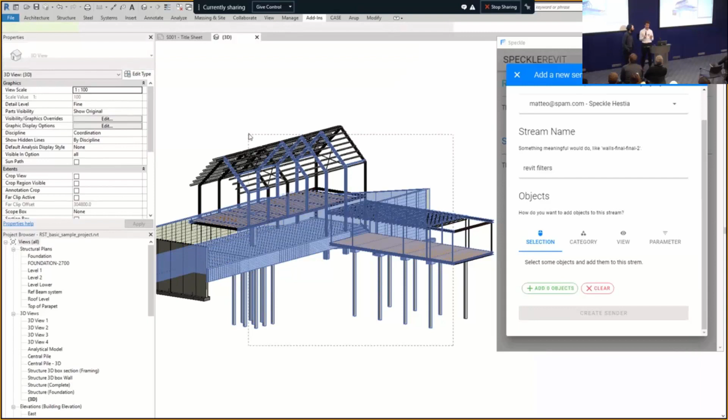Yeah, so a few slides on the clients and some of the updates on the clients. Here we're showing the Revit client. If you don't know, it's been released in beta, so it's part of the installer, you can download and try it out. Here we're showing that we added selection filters. So when you create a sender and you want to send geometry, you can filter by category, by selection, even by parameters and view.

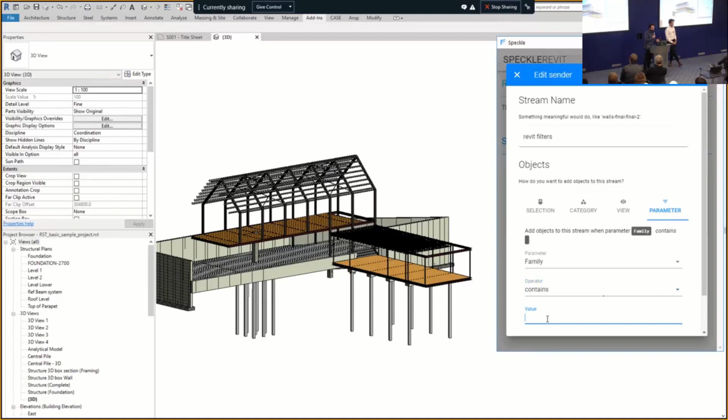So you can see here how we are selecting elements by a parameter, for instance, and all the objects that have that parameter with a specific value. So you see how you can specify an operator. If a family name contains 'pile cap' in this case, all the pile caps will be selected. So this is just to give more control over what is being sent and how.

And if you want more information about the Revit client, just visit the documentation online. Here is a screenshot of the Excel client that Mish is going to present in his speech. This is not being released just yet, it's not part of the installer, but he might mention how to try it out. And it's great, you can see the shiny UI, so it's pretty cool.

This is the Blender client, which is not really new, it's been around for about a year. It's been developed by Tom. For all the Blender users out there, check it out on GitHub. It's ready to be used, and it works well.

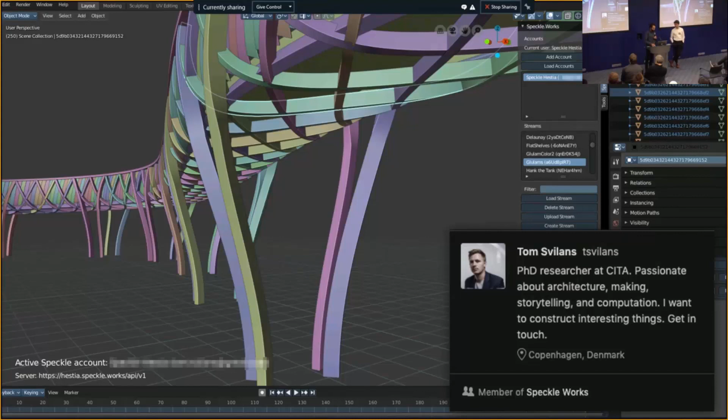Next. Yes. A bunch of other features? Yes.

A bunch of other random stuff that happens from the community, right? So, is anyone programming in Go here? No. Does anyone want to program in Go here? Well, I do. Cool, yeah, good.

So we now have Antoine, who developed a Speckle Go client. So if you want to hack applications together in Go, you have a starting point to work from.

We also have a nice Python SDK. I know there's probably a lot of Python users out there. Hello Giovanni, welcome, you're a bit late.

We have a quite well-developed and well-tested Python SDK for Speckle, which helps you scaffold whatever Python script or Python-based application you might have to talk with the Speckle API. It was developed originally by Tom to be used in the Blender client, then Antoine came in and did the documentation, and Izzy contributed too, as far as I know. Izzy's going to talk more this evening. Wonderful stuff for the developers out there.

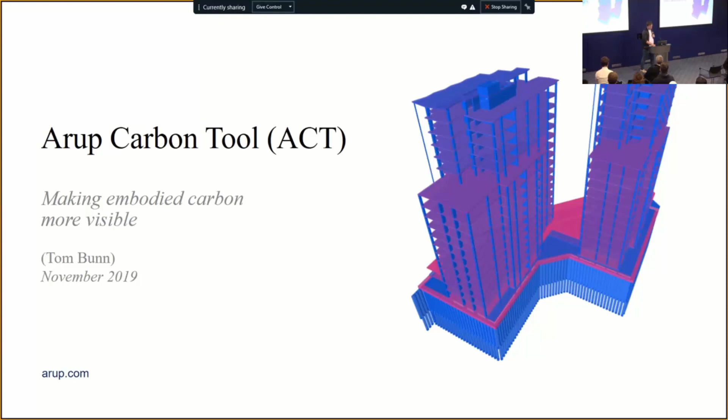Here's a screenshot of the tool itself. I've got a video in a second, but I thought I'd put in a couple of screenshots in case that video fails, which happens quite a lot. The tool is built through Speckle Viewer, and again, I'm not a developer, so I'll let Dimitrie maybe speak about the details at some point.

But once you've pulled it through from whichever software you're using, you can visualize where the materials are used in your project, and it gives you a nice graphical output of where your A1 to 5 carbon, for those who know the RICS method for embodied carbon, sits within your building. Here's an example in King's Cross that we're currently designing in my team, where you can see that the steelwork for the structure on top has the most significant impact.

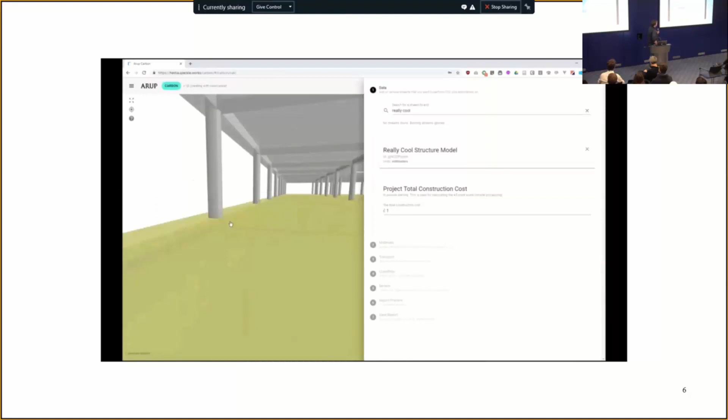So we put the stream in, we put a cost against the project, we filtered down by Speckle type, and so it gives us columns, walls, slabs, beams, whatever. We can apply a material against that.

Unfortunately, Arup's Revit models don't map well against the ICE database. It's a bit of a manual task at the moment. You've got to go through and go, okay, that's that. But it gives you a nice way of going, okay, the purple ones are that, and I know it's the right thing that I'm putting in, and you can check against it.

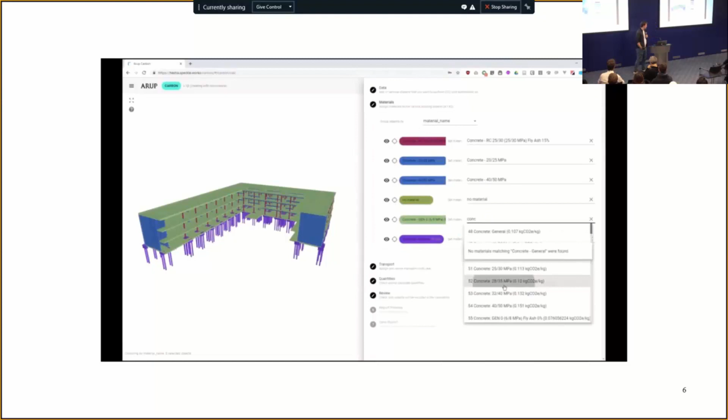With A1 to 5 carbon, you've got to put transport details as well, so it gives you some standard factors, or you can put in your own custom ones if you know more about your site. And it generates this nice report, and you can go back and go, actually, that's not concrete, that's timber, that's whatever else. I want to make the report look better. And eventually, it spits out this.

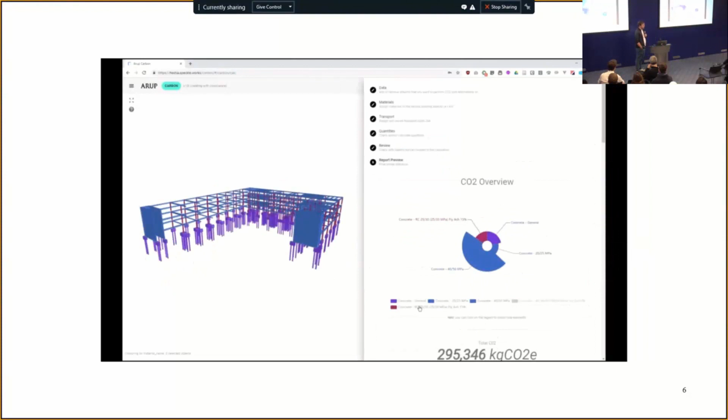Let it run for a second. There we go, and you can kind of filter down and go, that's where the carbon is, and there's a link to methodology we're using. You can give it a name, and you can tag people like Graham, who's here tonight, and say, Graham, there's a report for you. He'll pick it up in his Speckle projects, and can go view it.

And so we can send this URL to architects and clients and whoever else we want. We can pick it up in a review. They don't need to have Revit installed or Rhino on the machine or any other visualization software. They just need to have the link and a connection to the internet. And we can then talk around where the carbon is, what the project is currently doing, and how we can make it better.

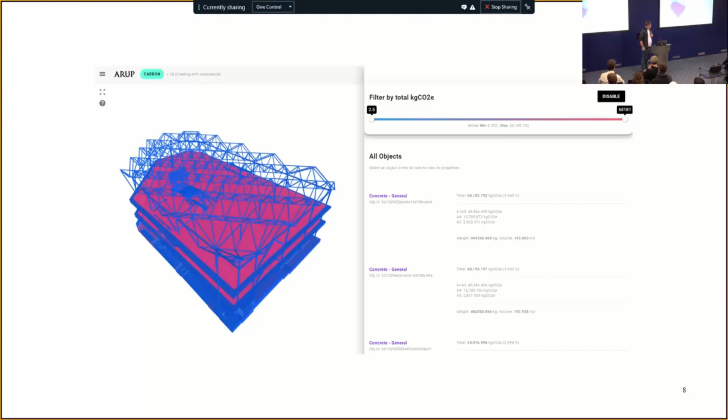So what we're finding with the tool itself, we are one of many tools that are looking at embodied carbon assessments. I think at my last count we had about 20 competitors within the industry. We're not too worried about that. There's very few that are doing this kind of nice 3D visualization, if any.

Lots are focusing on how to graph that information in Power BI, whereas we think we have a real kind of interesting slant on things there where we can kind of spin a model around and see it in real life.

Non-modelled elements have a significant impact on the overall embodied carbon equivalent of our project. So we saw some structural models there, and structural engineers don't usually draw rebar until about stage 5 of a design, and therefore we can't pick that up.

So Dimitrie's given us a quick hack recently to allow us to put custom volumes into the model to account for that. I think later iterations of the tool are going to find a way to neatly push that in.

Embodied carbon factors vary between regions by amount, which is significant. So when this database by the ICE is set and it's updated on a regular basis, they're saying, okay, your steel is produced in the UK, and the UK has a fairly clean grid, and the energy they use to produce that steel is not too bad.

Whereas if you went to use this tool in Australia, which is coal heavy, your factor would be much worse. So we might have to look at ways of getting around that and getting new data sets in.

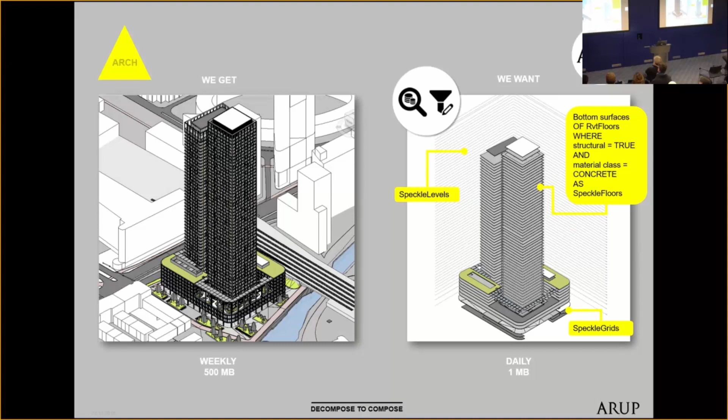So what I've been doing in a lot of projects is just exploring these models that we're receiving and writing queries. But this can be cumbersome and quite a maze sometimes, and I wouldn't recommend it all the time. But I want to show some examples where I've used these model queries for different file types and set ups.

To generate new models, I'm going to start off with the same example. As you all know, Revit is a highly structured piece of software. For this project, we got Revit models from the architect, and we need to set up an analytical model.

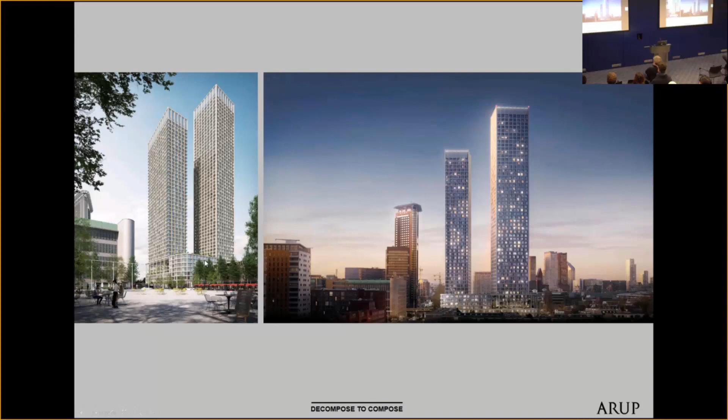And as a little exercise, I thought, okay, can I generate a structural BIM model without doing any modeling? Because I know the engineers were building an analytical model in their software, in this case GSA. So I just needed to link these two sources of information together and generate a well-aligned structural model.

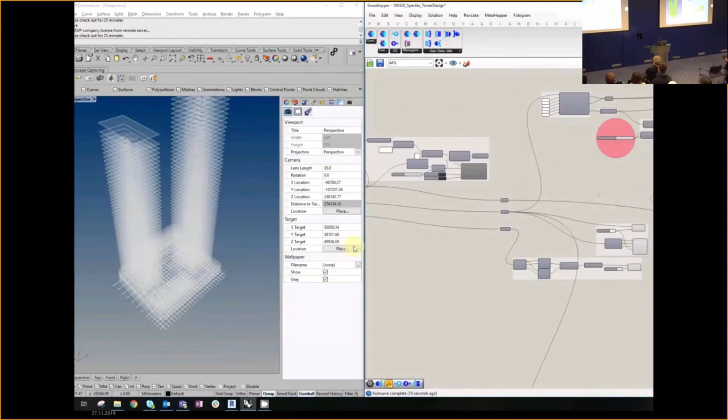So this was I think like 7 months ago, this project, where there was no Speckle Revit yet. So I built my own little query in Dynamo, and I would stream the levels, grids, and floor outlines and some properties. And then based on the information that was coming in from GSA, I would match these two to generate an IFC model using Geometry Gym, with some control over the bridge, some openings, positions, offsets, alignments.

And then this I could stream back to Revit or export as an IFC to send to the client. So this was a little exercise. It's not a perfect workflow.

If I would do it over again, I would do it way different. But this is an example of how you can use Revit data from an external party to generate something new.

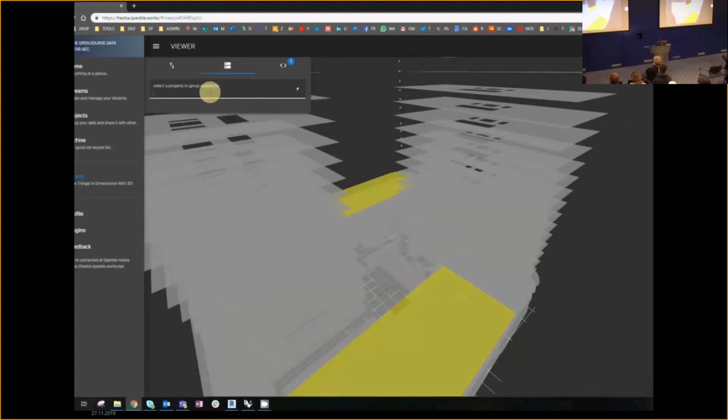So yeah, this is the old viewer. It has been improved now. There is some clipping going on, but here I'm showing that what I'm generating is this structural model that is now coordinated with the architectural model, because the scaffolding is from the architectural model.

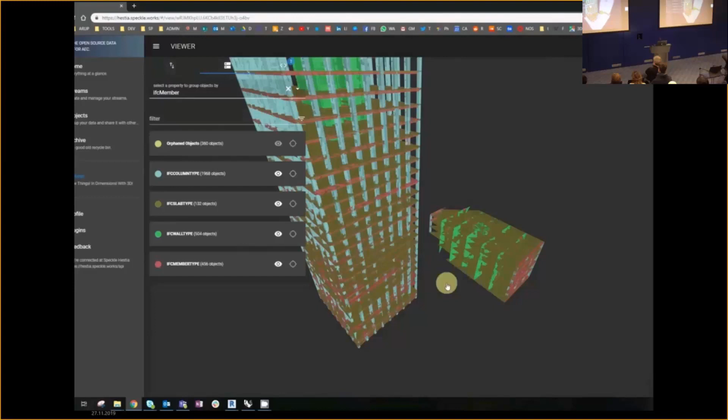So that is that. Next up, PDFs. It sounds old school, but we do a lot of retrofit projects, and we still handle a lot of PDFs. I work with them all the time, and I receive them. What we have to do, what we can do, is decompose PDFs.

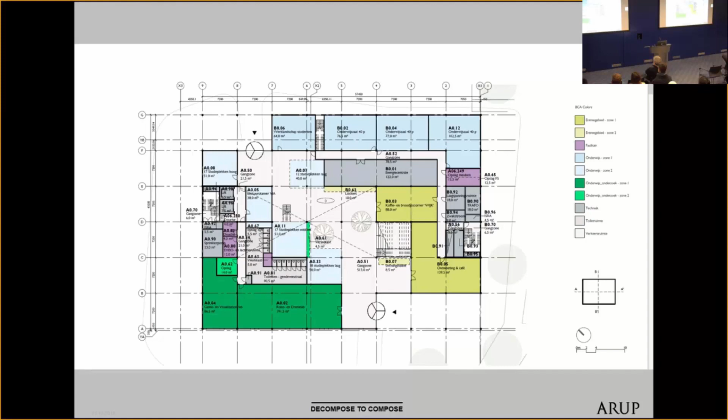They're like, if they're vector based, they're line objects, they're colors, there's legends, there's text objects. You can interpret that and translate that. And here there's elevations. So when you import that in Rhino, for example, you can look at the placement point of these PDFs and with some logic align these, and then match these colors to the legends. And what I would do then is generate Speckle objects in 3D.

So this was also a little exercise, but I can imagine if there is a client or anybody who has a stack of PDFs that are organized or structured the same way, you can generate the scaffolding of something new very quickly. So then here Speckle can be used to process a batch of PDFs.

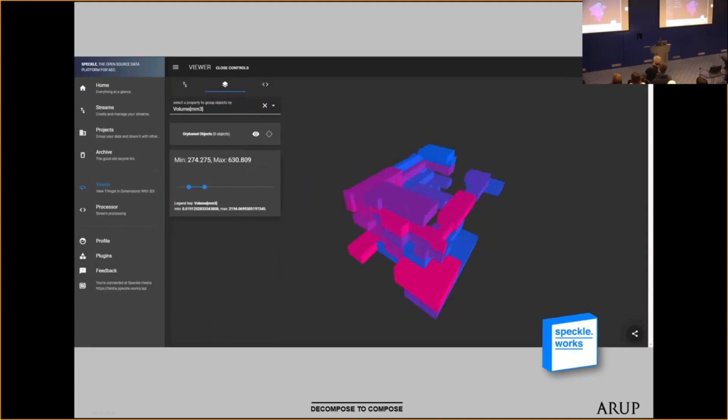Next up, also IFCs. You can decompose into individual elements. So this is another project we're doing in Amsterdam. They're building it now, one of the tallest timber high-rise buildings, I think. And right now we're in the construction phase, getting IFCs from the contractor on a regular basis.

IFC is a file format that you're not supposed to decompose. Yeah, you can decompose it, but not generate something or edit the content of it. But you can decompose it into all the property sets that you see at the bottom, and you can specify what property sets or specific properties you're interested in, and then map it and generate Speckle objects again from this, because it's an open file format that you can decompose into individual line objects. I'm using right now the Geometry Gym IFC Decompose tool.

And what I was interested in, because these are openings that they want to make in this tower, and we have to check if structurally it will still be okay, and we have to design rebar around these objects.

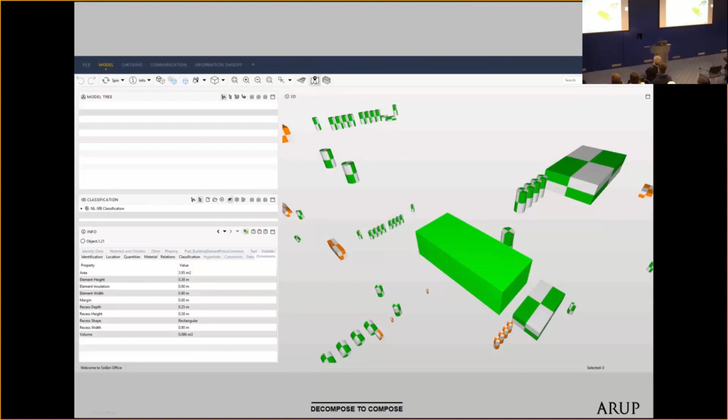So this needs to go into our Revit model with our own library and with some checking procedures in place. So what I do is, what you're seeing here are the center lines of these opening objects. I'm extracting the center lines, and then trying to identify in Revit where it's clashing or touching an object, and then generating a family instance on that point. So this is not the most sexy example of decomposing an IFC, but you could do lots of things also with IFCs in combination with Speckle.

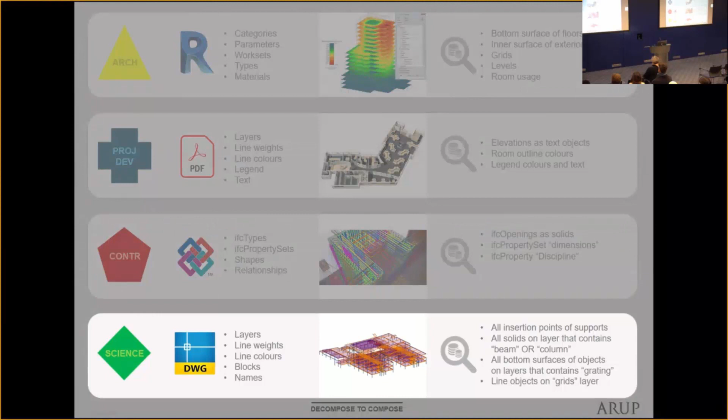And then finally, this is very similar to the PDF. We work with science and industry partners a lot, and what I came to know is that it's not just the building industry, it's a much bigger industry, and the global general standard to share 3D information is still DWGs. They're well organized, these file types, but not as standardized as Revit.

So there's a little mapping exercise you have to do with DWGs. For example, this is a project where we receive files like this twice a week. And when you look at it, there's all these colors and layers you're not seeing here right now, but in the layers there's different strings. There's a lot of information again in this model.

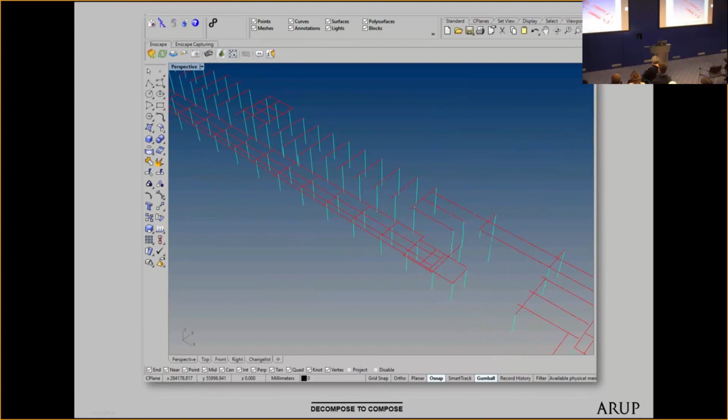So also with these models I try to exercise decomposing it into something useful for our analytical models. I'm extracting the floors, generating Speckle floors, grids, Speckle beams based on these filters and queries. And then finally generate a Revit model that is well aligned and coordinated with dummy elements, and we send that to Tekla where it's designed, and send it back to Revit, and then we have a model that we can share with the client.

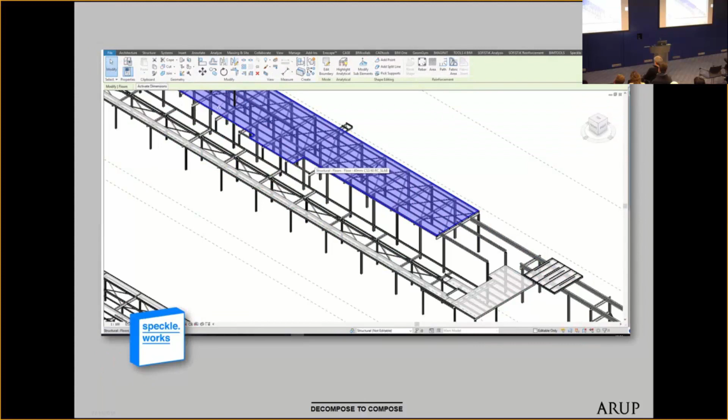So going back to this workflow, I think it can be improved, because what I'm doing usually, decomposing these foreign structured models, can be tedious and time consuming.

I think when you look at what we are doing, a lot of people are doing, I'm not concerned about what is happening within your organization, what everybody is doing within their organization using Speckle, because you can communicate with each other and tell the other person what you want. But when you're working with external parties, it's harder to specify because of political reasons, or there's also a risk involved when you try to specify the information you want, or if they could set up a stream, which in turn will maybe cause conflicts in your models. So trying to look in these models yourself can be a pain. So I came up with...

These are my wishes, my Speckle wishes. Some kind of Speckle model decomposer in the admin app would be a dream come true for a lot of people. I think a lot of this might not even be possible, but I know that, for example, with IFCs and Rhino models, you can decompose them and read these models, probably even inside Speckle, in the admin app where people could upload these models and it could display the structure. The uploader on one end uploads their models and doesn't have to be concerned about what they send. But we on the receiving end can specify in the admin app what we want, set it up once, and then it streams from one side to the other if they keep their structure maintained. This will probably overload Speckle with all these big models, but there might be use cases here, I think.

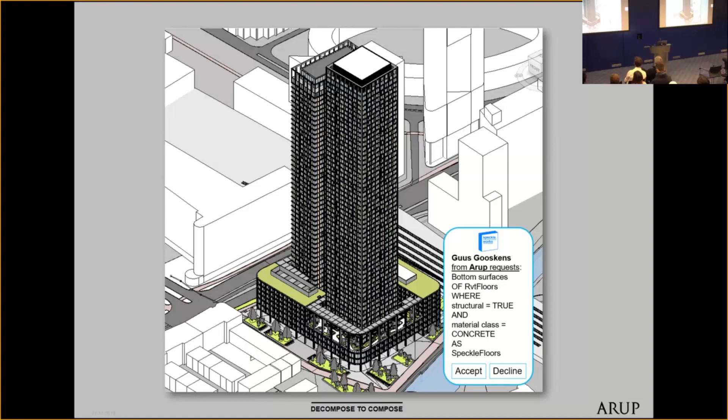Finally, this is something I came up with recently: when you want a specific piece of information from an external party, you want to specify that and perhaps send that query to them as a request. So this is the other way around, where I'm showing an example of what if you can specify what you want, and the architect receives a request for a stream with a specific query, which could be a package of queries, and then he can decide to accept or decline. Okay, that was it for me. Thank you. That's actually quite cool. Thank you, Guus.

Those are really good ideas, and we'll pick them up. Regarding the uploading stuff, we wanted to do that already, I'm not joking. So your wish list might not be ready by Christmas, but let's say we're on the same wavelength. Thank you very much for staying late and presenting. Yeah, no problem, cool. So next up it's Fernando's turn, who's also been instructed to hurry a bit, I'm afraid. It's not his fault.

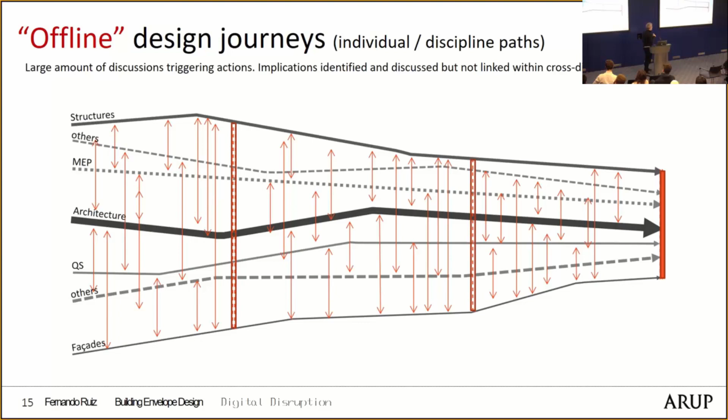So what could those two approaches mean in the design environment that we are more familiar with? I think we are now in a more offline design environment where we have a lot of individuals and disciplines working together in different files and formats, at different speeds probably, with deadlines and constraints, and we try to communicate as much as we can to inform others' outcomes, and try to understand what are the requirements from others to arrive at the right answers. But it's still quite an intensive process that requires a lot of translation, interoperability, duplication of files, etc.

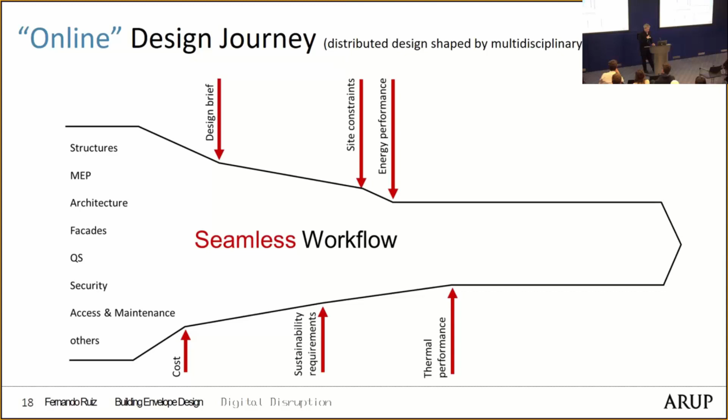So on the other hand, what would that online approach be to the design journey, let's say. Imagine we had this kind of common environment where we are all sharing this environment, and we can plug our tools to start shaping goals and constraints from a multidisciplinary perspective, and arrive at the answer from this sort of common environment, again avoiding the duplication of files and overlap of information.

So my case study, which is a kind of hint to try to use this sort of approach in a sort of contained piece of design, is this: imagine you have this tension structure, a rather large tension structure roof. Tension structures tend to move quite more than usual, and the movements are greater than other structures, and therefore the implications on the glazing, since I'm from the facade, the envelope design, I'm more concerned about what that skin is and the implications of that structure.

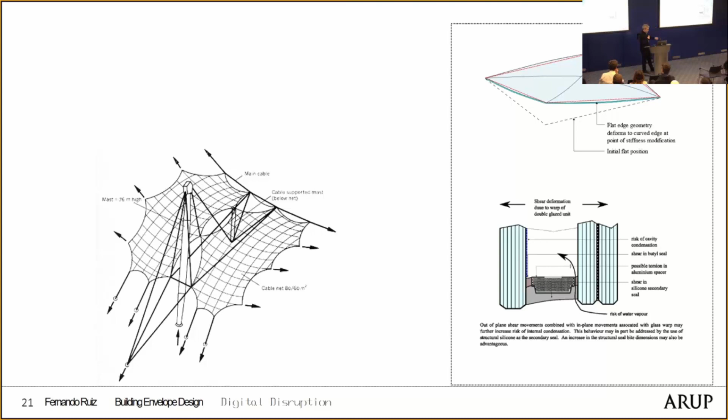So we typically develop a series of studies to understand the implications of that movement into the glass and the warp - how can we ensure waterproof resilience, what are the stresses on the glass from that warp, and what are the risks of compromising the seals, etc. So rather an intensive piece of work.

But now imagine that the structure is actually the support of a massive water feature with jets shooting lots of water in a sort of dynamic performance around the roof. So now you have an asymmetric or unique geometry with asymmetric structure that has asymmetric and dynamic loads on it. So it's even more difficult - what can possibly go wrong here?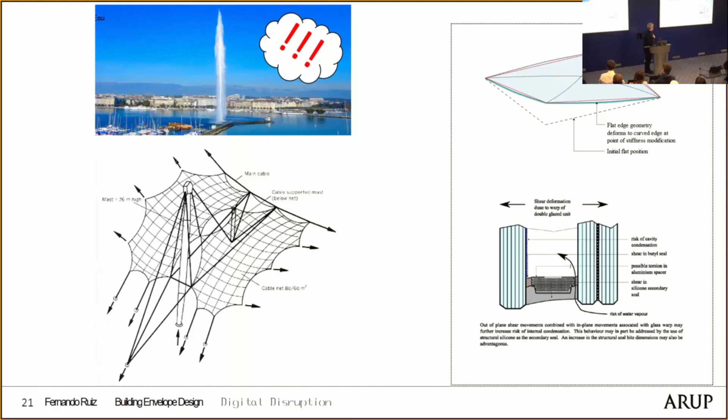A few things, and I'll introduce you to those challenges very quickly. Again, understanding the movements and the shear, the compression of the joints, how they open up and down, are even more important in this sort of context.

Different load cases make the structure behave in different ways. We cannot, in this case, isolate a portion or a typical bay because it doesn't exist. So everything is a bit unique, and you need to develop a very good understanding of the overall behavior. It has dynamic loads and therefore emerging behaviors that are more complex.

So we have to address this collaboratively from architecture, structure, and facades. The traditional approach is very time-consuming. Now imagine you can use a Speckle object, kind of similar to BIM, where you can embed data and parameters that other consultants need to carry out their job. You can embed information about the geometry, the analysis, the optimization.

You can then stream that into your collaborators' tools, almost like all the disciplines plugging their tools into this data stream and introducing additional layers of information, whether it's optimized geometry for the structure or useful feedback on how things behave and what to watch out for and improve.

That will allow a workflow in which ideally there are no overlaps or duplication of information, but information travels from the designers to the consultants who assess that design. So the structural engineer and facade team build their models based on that input.

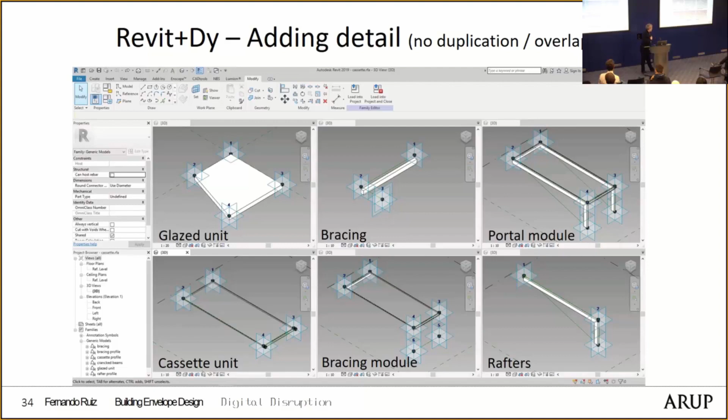So the architects might be building the adaptive components for the roof, but the actual build-ups or dimensions of the rafters will come from us. So we don't need to produce another model, we don't need to send lots of pages of reports, calculations, etc. We can just fit into that strategy.

So we have a clearer line of how things evolve. That's what we were doing in this example.

So architects will stream information about the panels. In the video it's very laggy, but it was showing a more practical way of how we're collaborating. And because this isn't very good and we're a bit stretched for time, I'll conclude.

Speckle has been a very great asset in these workflows and proves to be very, very useful. As was said at the beginning, it adds value in that it connects the different design parties much better, so they can collaborate and communicate better.

As Mike was saying at the beginning, our dream was to shape a better world through total design, and I think this platform definitely enables that. It enables enhanced collaboration where people can connect their platforms, and disciplines can get better connected—knowledge, people, etc. So it can only get better on this massive landscape of data.

Hopefully we see more people collaborate in this environment, and we have to fight less with questions like what is the latest file and has it been sent to the right people. So thank you.

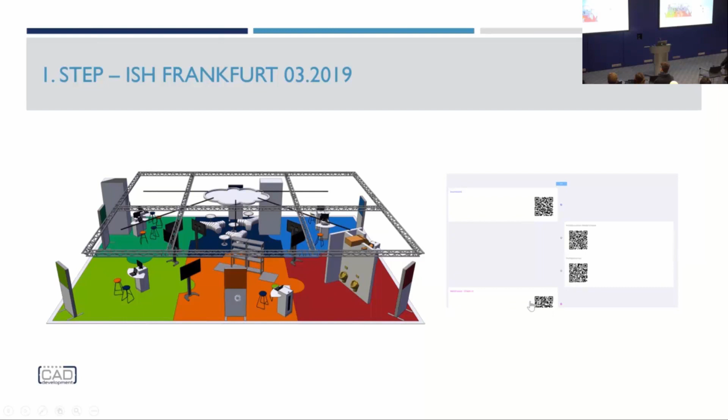We had five different sections to explain the workflow and what could happen after the design phase—handing over data to prefabrication and the warehouse, delivering stuff to the building site and mounting it, and later to the operation site. In the background, we used Speckle as the data storage and the machine that serves everything, with a WebSocket-based approach.

One thing I'll show shortly, live, is a dashboard connected to the Speckle streams. We showed how to track the status of parts, and tried to demonstrate different approaches for how an installer on the job site can get access to the model.

So, my demonstration works—it should be live. Hope you can see my Chrome browser; that's the UI of the scenario we implemented. We have a dashboard, quite straightforwardly implemented, with different phases, and parts in the model that are in a specific status.

The one thing I can show you is the check-in. So after the prefabrication, we had the warehouse check-in. I want to deliver a part to the building site, and afterwards check it out again. At the moment we have two parts in the warehouse, and if everything works well, I can show it.

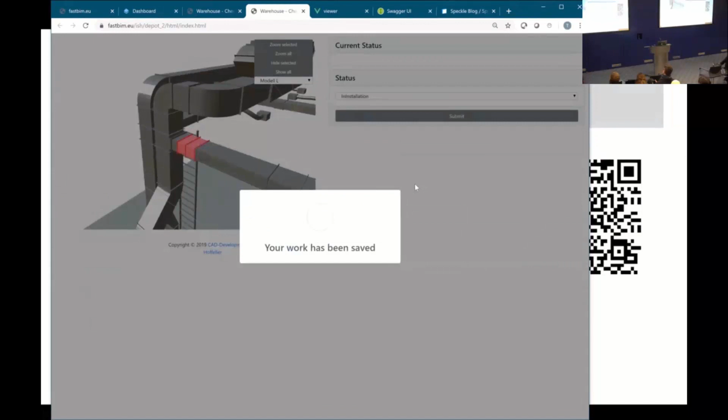So now I shift it to the next status. We hand it over from one phase to the next, showing the workflow of parts through the building life cycle. If you want to check it out, it's still alive and should work.

So that was our first contact with Speckle. Afterwards we got a call from a big manufacturer that creates fantastic red-colored fire stop elements and so on, and we implemented on top of this approach some functionality for their BIM center. It's nearly the same approach we did at the ISH trade show. But some things we were not so satisfied with because there was only a limited amount of time, and so we couldn't configure the parameters - that was hard-coded at the moment we implemented the solution.

We want to map it to different models. We didn't catch use cases, so how to deal with different access rights and roles and stuff like that. For this trade show, the intention was everyone with a mobile phone could immediately participate, so we had no login, nothing, which is not a real-life scenario, of course. And how to deal with phases in the project.

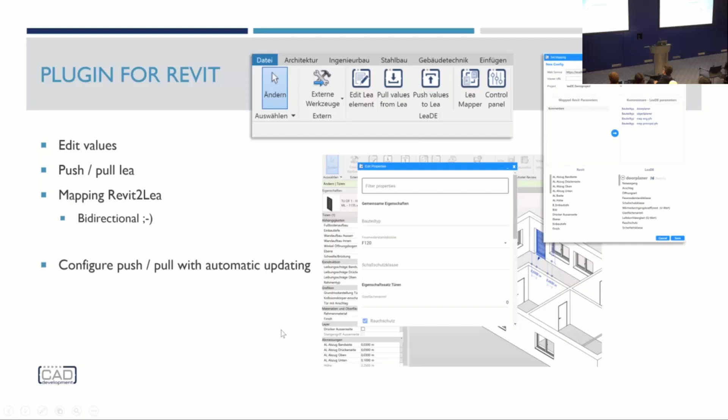In the background, of course, you need to configure this stuff, so we can create cascading projects, so you can also handle, thanks to Speckle in the background, very big amounts of data and projects. On top of this, we implemented this project phase logic and the use case handling, plus the guidelines that control everything. That's a short view to the implementation, how we did it.

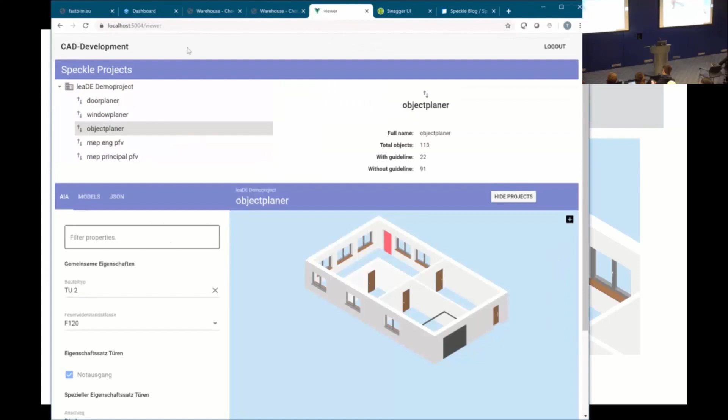Yeah, so let's shortly jump to LeaDE. That's our web front end. We have a project, that's a Speckle project in the background. Here you can set the phases. For example, if we go back in the phase, which will maybe not happen in a real-life project, but now for demonstration, you can see if I select the door, I only see one parameter.

Let's go to the door planner use case, for example. You can see, okay, we select based on the data in Speckle only the elements from the model the guy is interested in, who's responsible for the door planner stuff at the moment. So if I select the door, we see only one parameter. If I go back to another phase in my project, I see more. So I have now drop-down lists, and I can define the opening and the type of door and so on.

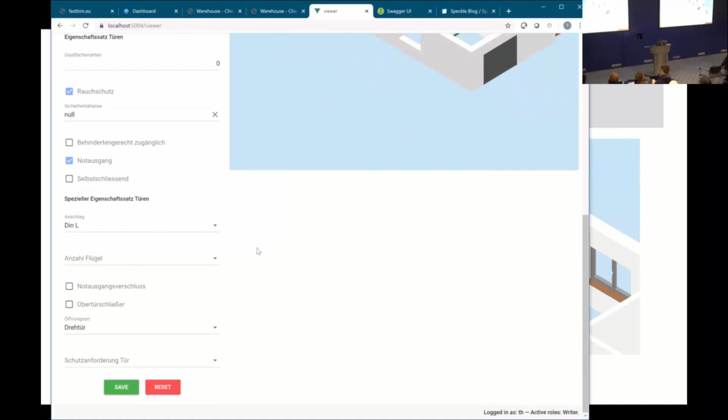These data here are maintained or provided from the guidelines. So the guideline is responsible to serve the right parameters. And if we proceed to the next phase, we see even more parameters, checkboxes, stuff like that. That's the same way for all the elements that have a guideline in the background.

The same UI is our Excel replacement. So in this case, if we go to the doors or the walls, we see everything in a list, as you can see, and we can assign the same parameters. So in this case, fire rating, excuse me for the German terms here, fire rating for this door, I can add in a more or less spreadsheet-like user interface. Yeah, the same stuff is available from Revit.

So if we select the door here, you can go to the edit dialog, and if I change something here, it is pushed back to Speckle, not to the model, as I mentioned before.

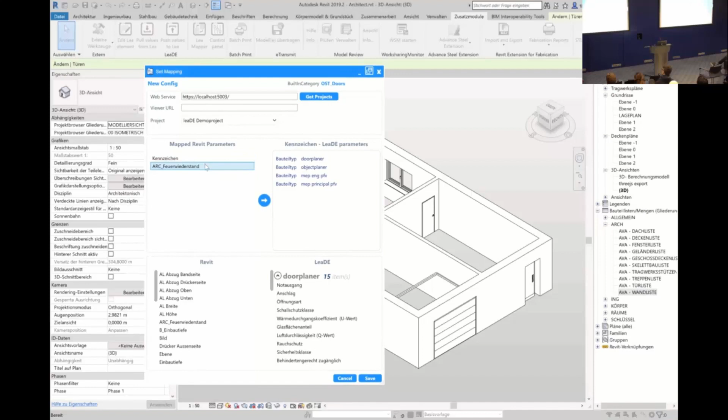One thing I should show is the mapping. If we want to push data from the model, this is my Revit family selected with all my Revit parameters, and I can map my internal Revit structure to this more generic way of parameters coming from the guidelines, or provided by the owner of the building. We can map in both directions. In this case, this one is going to the database, and this one is coming back from the database.

In this case, we can push in both ways, so that you can push and pull the data together with the geometry to Speckle in the background, and make it accessible for people who are not sitting in front of the design software.

That's it so far. I'm done.

So the next one up is Matthew, who is typing in from Cincinnati. Am I right, Matthew? Yeah, that's right. Is the microphone working? Yes, we can hear you loud and clear, and we can see some emojis on the screen and your name.

Matthew has been a really long time contributor to Speckle, helping us firefight various bugs and issues, and adding functionality whenever he saw an issue pop up, fixing it if he had time. Matthew now works at Woods Bagot, and that's it from me. Matthew, it's all yours.

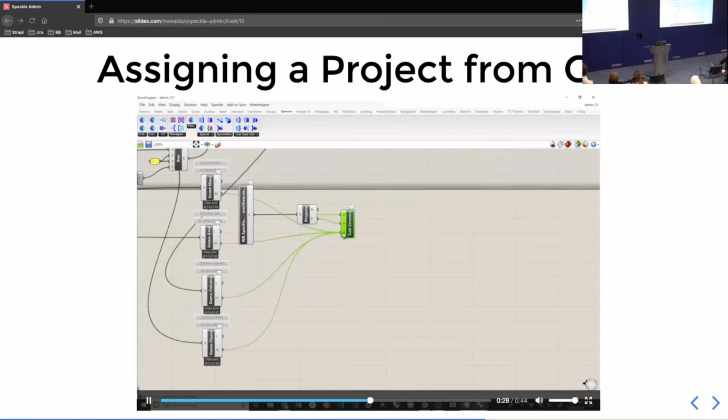These have all been improvements to the web interface, but we're also doing some improvements to the Grasshopper client. Here we're able to assign streams to a project from the Grasshopper client. Let's say we have a bunch of different streams all related to the same building project — here they're mass, grid, columns, floors. We want to associate all of those with a project called demo project. We can do that here, and then next when we go to look at that project, it will have shown up. So we can quickly load that up in the view if we want to get an overview or share an overview of the project.

Finally, something completely unrelated, although a little bit related — we're talking about plugins for admin. I've been working recently on this, and it will be merged into the Speckle Admin master branch soon: the ability to dynamically register components for the front end. Sharing is great, and open source is fantastic, but sometimes we need to write a piece of software or an extension for Speckle Admin that is specific to your company's workflow, or for other reasons needs to stay private. We'd like to do that in a way that still takes advantage of all the great things in Speckle Admin, so the authorization flow, the viewer, etc.

Luckily, Speckle is built using another open source project, Webpack, that allows us to look at a folder within our Speckle Admin project and add components dynamically as we're building it for production. We can then add those components to the routes within our Speckle Admin viewer or web client, so that we can add plugins that live in a separate repo, something that's not shared publicly, pull them into our Speckle Admin project, npm build, and then they'll be added.

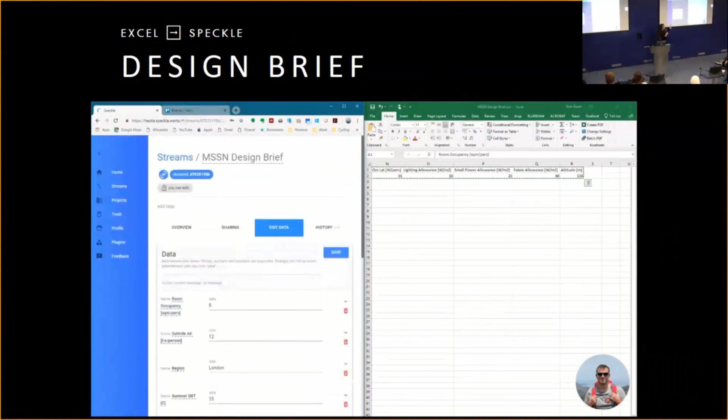But this is the first stage. Here, Tom, the first collaborator, was simply copying and pasting our design data or design brief data from an Excel spreadsheet into Speckle. This is the old Speckle UI - ignore this - and then emailing the rest of us the link. If you don't know Speckle, you can store all your data in different streams and then collect them into a single project. So what we did was have a single project for all our Speckle streams that we were using for this example workflow.

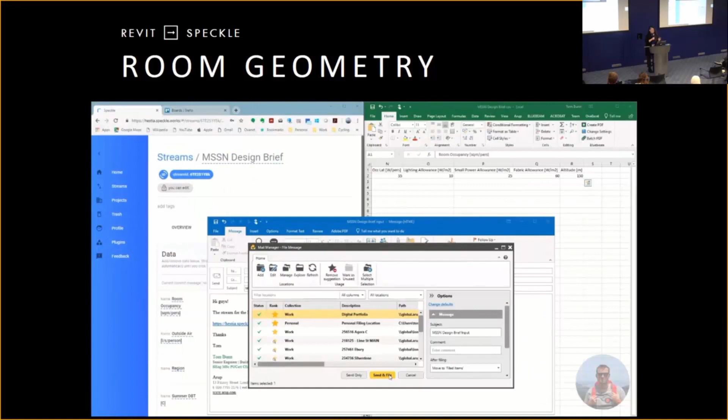The next step was getting design data from Revit. Here I'm using a Dynamo script, and what I'm doing here is just pulling out all the room geometry information, like the name, height, floor area, perimeter, and other stuff like that out of the Revit model, and then into a new Speckle stream added to our project.

And then now for the calculations. So this first one is not what I wanted. Oh!

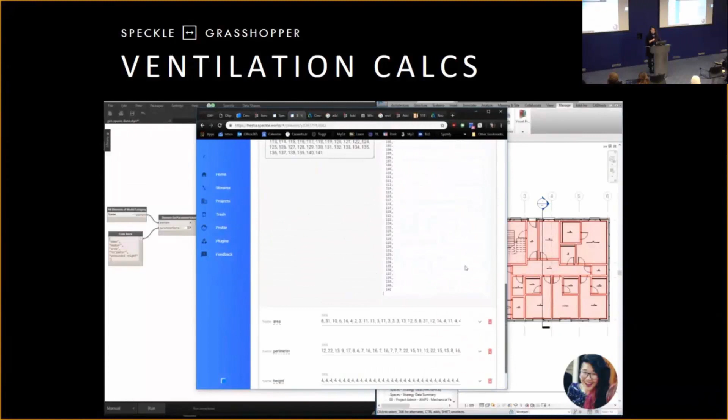So this first calculation was the ventilation calcs. Here Tom has a Grasshopper script that he's put together that does the whole calculation for us. All he has to do is pull in that initial design brief stream and then the room geometry stream that I just created. Then connect it all up, and at the end it'll push the results from this calculation into a new Speckle stream in our project.

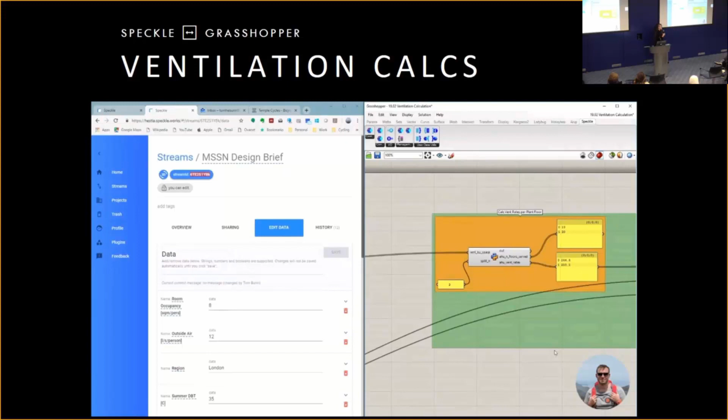So here I'm doing a very similar thing, but I prefer to use Python, so I have this Python script that was doing the sensible, latent, fabric, all the different room gains based on the initial design data stream and the geometry stream I created earlier, and then just does all the calculations here and pushes it to a new stream in our project so everyone else has access to it.

It would go there if this video played. We'll just move on. And then here, the last calculation was David's AHU sizing.

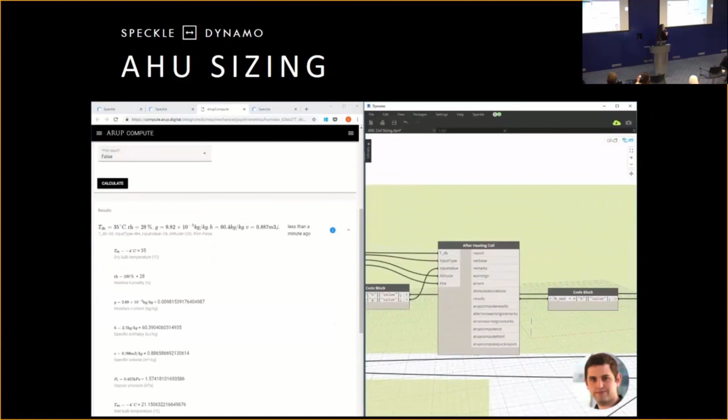Here he's using Dynamo, and he's using these custom components that are exposing this internal Arup calculation tool called Arup Compute. But basically he's just running all the calculations within this custom Dynamo script and then pushing the results to a final calculation Speckle stream.

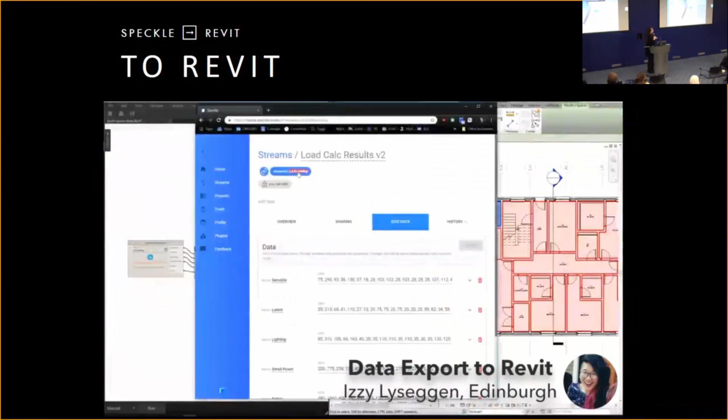And then, now that we've all got all the calculations, this last bit is just tying it all together. Here I'm taking those load calculations that we did earlier, and I'm using Dynamo to push them back into the Revit model so they populate the parameters for each of the spaces, or the corresponding spaces in the model.

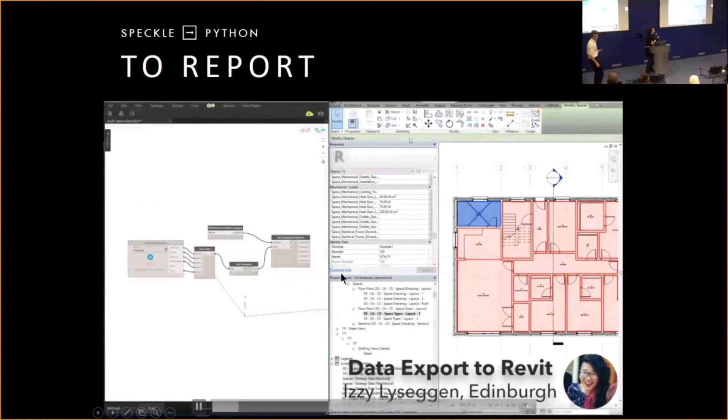If you move the mouse, it might actually trigger it. You have to click play maybe at the bottom. Play, yeah. Is it? I can have it. There are two different slides. Is it? It's moving. Okay, well this is the final step.

So here we're just picking up all the streams that we've created, so all the input streams and then the resulting calculation streams, and then I'm using this Python script to compile that all into this report template that is produced in this nice PDF here.

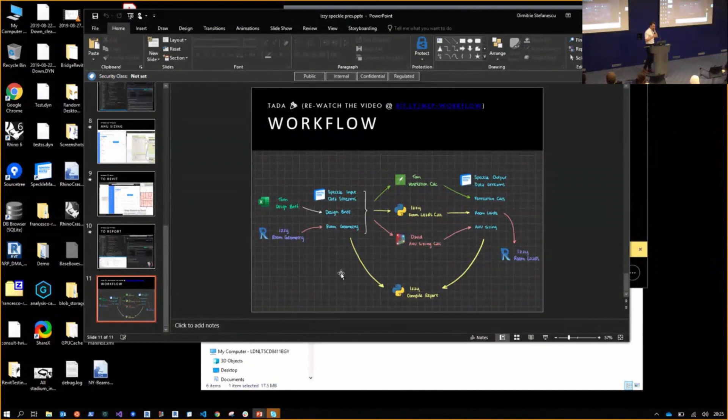Izzy's defense, we forced her to export her nice Keynote presentation to PowerPoint just before this presentation. But I hope for me this is quite interesting. This was the first cool workflow that I saw when I joined Arup. It was pretty much coming from Izzy and Tom.

Now, next one up is Mish, if you're still awake. Please. Mish is from Toronto, and he actually did most of the development work for the past 6 months. No pun intended, even though he's not working for Arup anymore since 2 or 3 months. He joined us over summer from Toronto, and he developed quite a bit, I mean, he put Matteo and me to shame. Let's just leave it at that, okay?

Okay, thanks for that introduction, Dimitrie. So my name's Mish. I worked at Arup for a year as an intern, started off as a structural intern, and then moved to the digital development team here in London. And right now I'm a student at University of Toronto.

Just to preface this, most of my presentation is also in the form of a video. And unlike Izzy, I didn't have the foresight to publish this online, so if anyone would like to have a clear picture afterwards, I'll share it somehow. I'll be going over 4 separate products or aspects of Speckle which I've developed. Firstly, the Speckle GSA component, which connects GSA to Speckle. Secondly, Speckle Excel, which takes data in and out of Excel. And then 2 kind of new developments called Speckle Manager and Speckle Processor, which I'll go into more detail later.

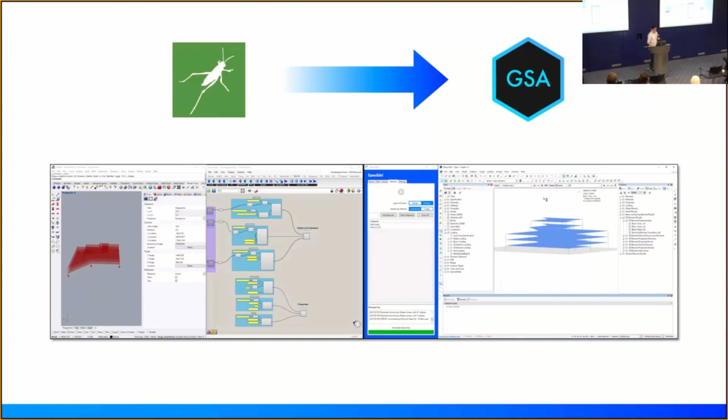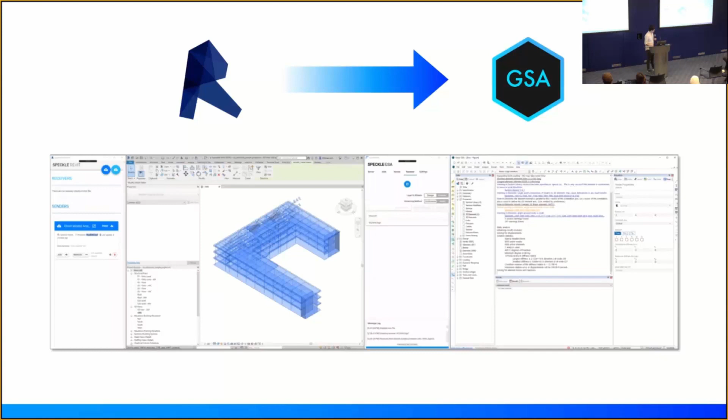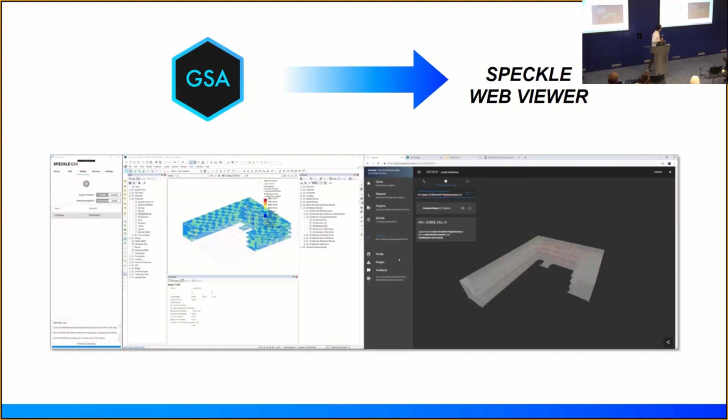Now on the other side, taking data out of GSA, we have that same model that we've analyzed, and I've created a stream and displayed it on the online web viewer. Every single result that you wish to embed into the objects is embedded, so you're able to display a contour, for example, of the moments within the slab and share that result and viewing with other people without having to share an entire model that may be a few gigabytes sometimes. So that's pretty much a quick overview of the Speckle GSA client. It's available now through Oasys if you would like to grab a copy.

It's free to anybody who's got a GSA license. So next, Speckle Excel. Essentially what it does is it takes all your stream data, which is essentially a JSON, and translates that into your Excel sheets as a representation in a tabular format.

It's still in early development, but for example, what you can do is you can create an object per row. In this case, I created a point, a line, a polyline, and a mesh in Excel, put in all the data regarding the coordinates, and now I've pushed it into Rhino without going through Grasshopper, so now I can control Rhino through Excel. So if I really hate Grasshopper, I can skip that step. I don't hate Grasshopper, by the way. As you can see, you can change any of the data within Excel, and push that, and when it's received into Rhino, all those changes are captured.

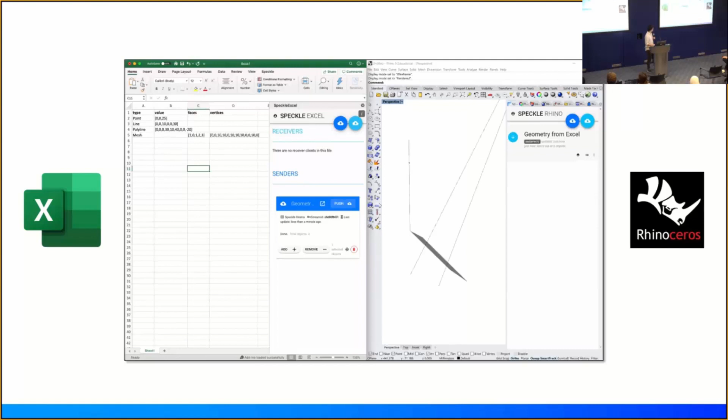Now, going the other way, from Rhino and Grasshopper into Excel, let's say I want to create a bunch of random numbers using the Grasshopper component. I can take all those random numbers, send them through Speckle, receive them in Speckle Excel, and create a histogram. So any changes in the random data that I've introduced is reflected. Obviously, this is a pretty trivial example using random data, but you can imagine this is very useful, especially when you have objects with a lot of complex data embedded into it, and being able to put it into Excel and leverage a lot of the design calculations that has historically existed within Excel in the engineering world.

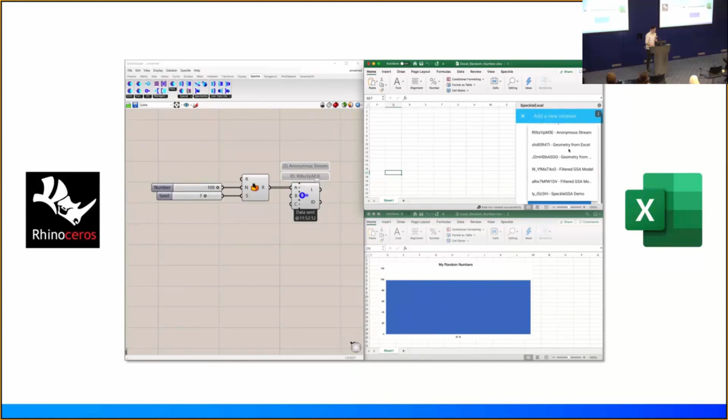It's still pretty early works, and it's still in development, but hopefully it's going to be released soon. Officially, it's going to be supported for Excel in Mac and Windows, and also Excel Online. The GitHub repo is right there. You can actually download it and sideload the app by yourself and play around with it if you wish.

So Speckle Manager. Speckle Manager is a desktop application that does three things. Firstly, it allows you to manage your accounts on your desktop. Secondly, it allows you to install and update plugins. And thirdly, it allows you to install and update kits.

So the current method for installing Speckle plugins within your desktop is by installing the large installer and running the exe file. So what Speckle Manager allows you to do is it allows you to select specific components that you wish to download. For example, Speckle Dynamo or Speckle Rhino individually, and install them.

And this is all pulled directly from the GitHub repo. So you're able to be notified whenever a new release is pushed out by the developer, and you're also able to switch between different versions of the releases. In addition, if a company or team has a specific or custom add-in that you wish to install, you can just add it to the list of repos for the desktop app to search through, and it'll add it to the list, so you're able to install that.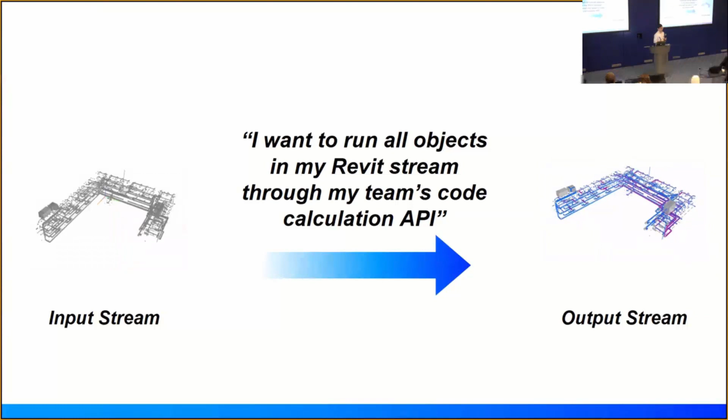Now for a more fun example, let's say you have a stream that contains all your MEP data, and it comes from Revit, and your team has a design calculation platform that you want to run this through so that you don't have to go through Excel and run all your calculations again. That's exactly what you can do with Processor. This is leveraging Arup Compute, which is a REST API platform for design calculations within Arup. Through Processor, you're able to download all the objects, run them through the design calculation platform using the REST API, and then embed the results within the object itself.

So that's Speckle Processor. The proof of concept is already deployed on the Speckle admin within app.speckle.systems. You may have seen a little tab right below the viewer tab called Processor. Feel free to check it out, play around with it. That pretty much concludes my presentation. So, thank you.

You can see why we're ashamed we didn't do half as much in the same period of time that Mishael was here. Processor is quite cool because, besides just attaching random numbers, you can see it's doing checks, or codifying your own kind of logic and embedding it into Speckle streams.

Anyway, now next one up is Poinet. Where is Paul? Oh, there is Paul, who's going to talk about yet another kind of enhancement or addition that could be essentially a whole research project in itself. Actually kind of is, partly. Specifically Speckle Viz, which is visualizing the data flow within the Speckle world.

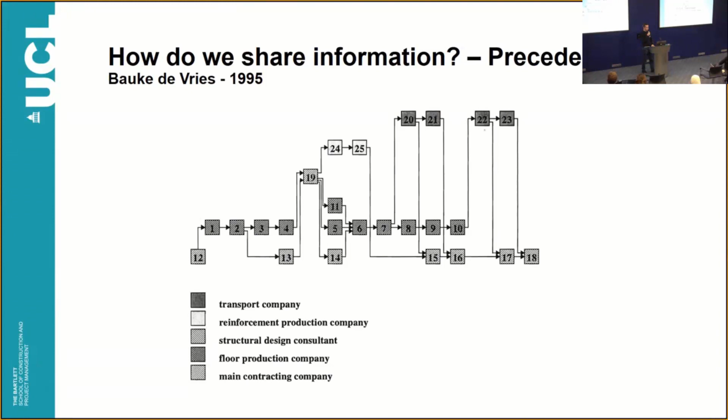Obviously that's not a new problem. It has been tackled by different individuals, both in academia and industry. I'll go through this quite fast, chronologically. This is Bauke de Vries in 1995, an activity network diagram between different companies. Then the thesis of Oliver Tessmann, which identified design cycles in the design process, in the building process, in 2007.

the Morpheus Hotel in Macau. With Bagot, in 2017, they generated a graph based on the data exchange in Flux between different Grasshopper, Dynamo, and Revit files. So this is confusing for everyone - we have a lot of boxes and arrows, it's quite complex, and we're all trying to solve this.

So Speckle Viz tries to address the same issue in Speckle. What is Speckle? No, I'm just kidding. I'll focus here on the Speckle clients - they help you basically track the data connectivity and dependencies through the design process. Each time you generate a Grasshopper component or a Dynamo node, Speckle will know when and where it has been created.

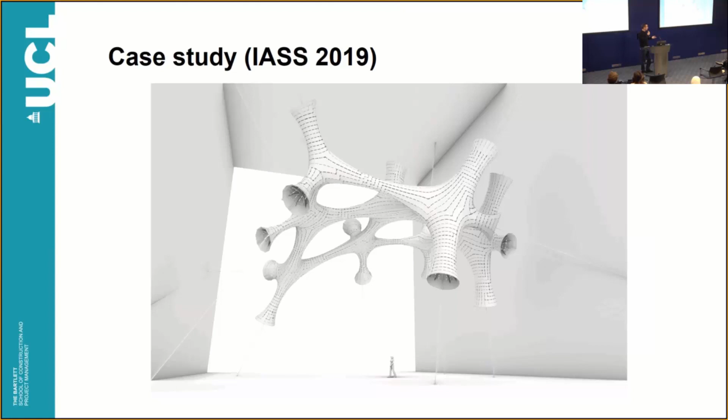Here's a small case study, because it's always hard to find building data, even in these grants—hard to get real project data for IP reasons. So I used a workshop I did with some colleagues last year. We are two persons: I work in London, my colleague is an engineer working in Brussels. This is the data flow between us two, the same data flow between different Grasshopper definitions.

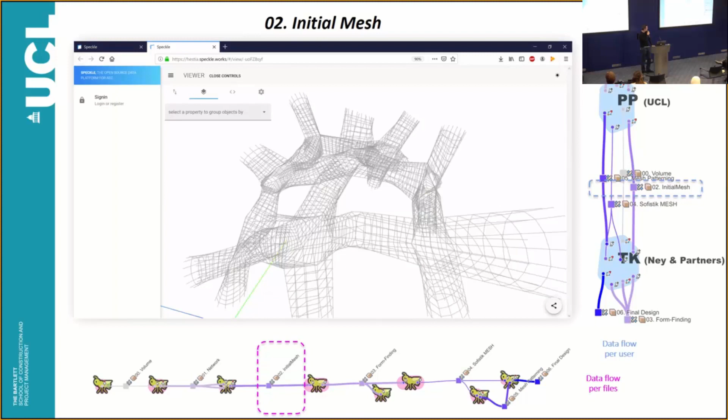You can switch between different modes. That shows you two data flows: the bottom one is per files, the one on the right is per users. Here I'm going through each stream. If you follow on both graphs the streams that are selected, it's the same for both graphs—you go from the abstract network to the most refined mesh, and it goes on until the data for fabrication.

That's a video showing the same thing again, but I'll skip that. And then we have a super secret consultant working in Arup—I'm just showing this because it was only two persons. You only saw the graph with two persons, but obviously you can add as many users as you want, so just to show you it can be scaled up and you can involve many persons in your project, and you'll continuously see the data flow.

I'll end up with this. It's kind of funny to see it appear laggy. A lot of people, when I show that, tell me it's a blockchain—no, it's not a blockchain. As far as I know, there's no blockchain inside Speckle. If you want to test Speckle, it's on the main branch now, same address, app.speckle.systems. All the docs, all the GIFs that were laggy so far, you can find on the main website.

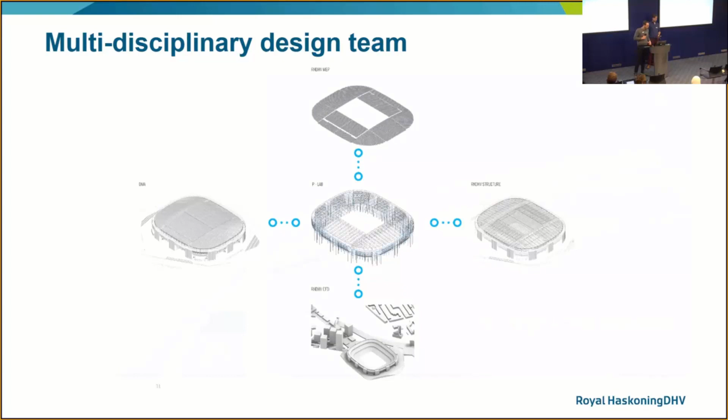What we set out to do was incorporate the requirements and guidelines from FIFA and UEFA, which were driving how we would build up the design for the stadium. OMA didn't have any parametric designers on the project, and they really wanted to make sure the design would fit these requirements. So we at Royal Haskoning DHV provided them with our expertise to incorporate this into a parametric model.

The key parameters here include the perimeter of the stadium, where all the seats needed to be within a certain range from each corner flag to be counted in the seat count, so that we would get a 60,000 seater stadium.

The other important parameter for UEFA was the C value, as they call it, which is the clearance you have over the head of the person sitting in front of you, so you can properly see the field.

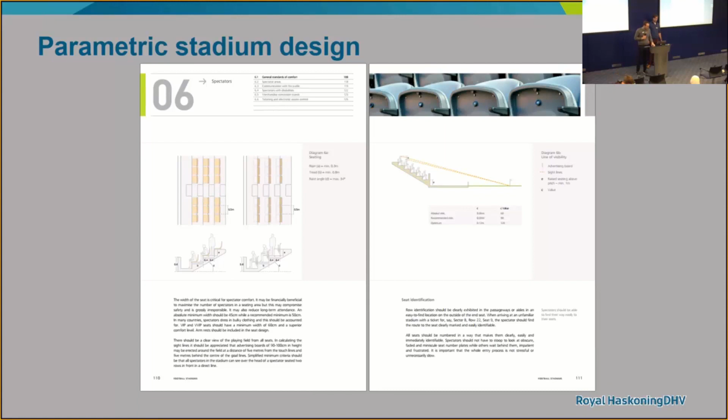We also had more soft constraints or architectural constraints to incorporate into this model, which was that OMA was keen on capturing the atmosphere of the old stadium. There was a lot of fuzz about a new stadium being built, and the supporters were very keen on their existing stadium, wanting to really capture that atmosphere, so we needed to work this into the model.

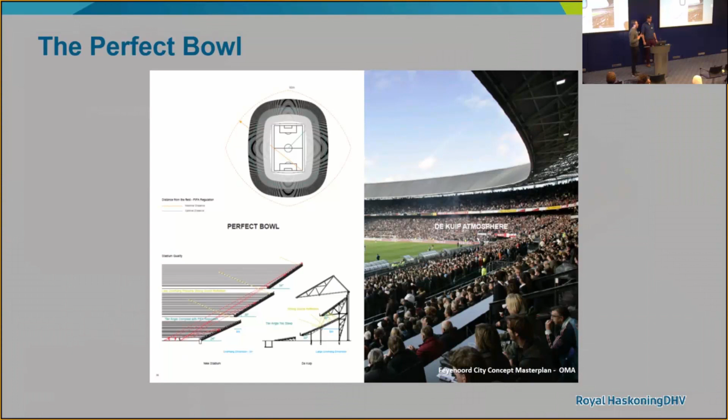What we decided to do was try and get this perfect bowl shape and realize it within the constraints that were more hard, given by UEFA and FIFA.

So we set up a parametric model in which we could evaluate the C values and make sure it's always within the given footprint or constraints from the field. Then we could optimize our C value while still maintaining this nice oval shape and continuing ring shape, dealing with the parameters to get an optimized stadium structure.

So yeah, this is sort of a straightforward implementation of Grasshopper in an architectural design project, I would say.

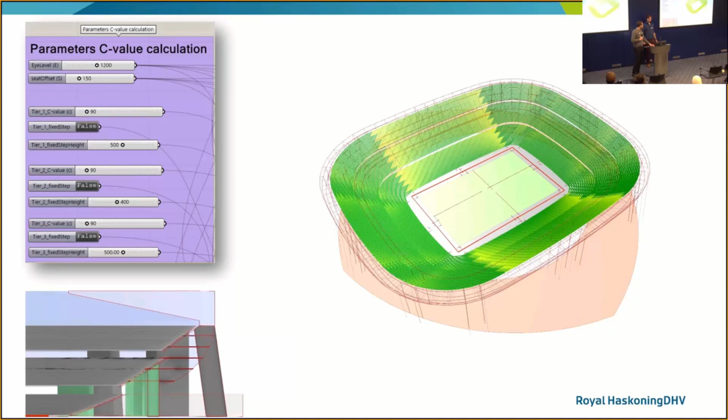But what we did from here was actually set up a coordination model that would define the outlines of our structural layout and the grid lines required to start setting up a structural model. Then we started using Speckle to exchange between the different Grasshopper models.

We went from this coordination model into a structural engineering workflow, in a separate Grasshopper file. This is also a movie, so that's going to be good fun. I can pause it, right? Yeah, I think so.

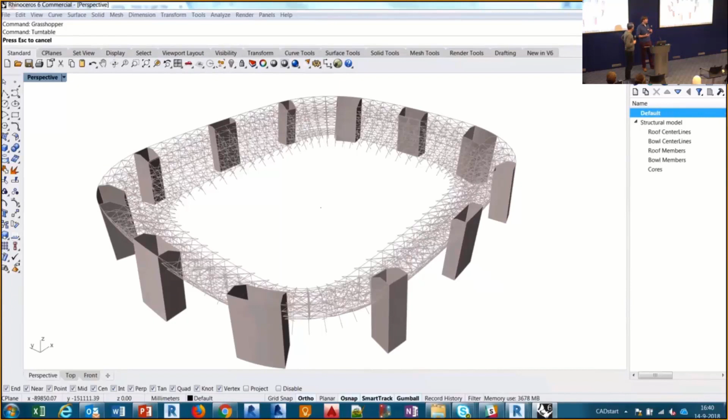There it is. From this coordination model as a basis, which we kept throughout the project, we built up two different structural models. One of the tiers, which we see here, where we have a lot of steel members and some concrete cores.

Let's see if I'll put it on pause at some interesting point. Try to put it on pause on some interesting stuff. Yeah, that's going to be difficult, I guess.

So we built our structural models in Grasshopper, created our Karamba models, and used Karamba in Grasshopper to optimize all our structural beam members and the layout of the structure.

Next to that, we had this for the tiers. We also had a separate model for the roof, where we had all kinds of different variants we had to evaluate and design, and these, of course, were connected.

This was at the first part where Speckle didn't exist yet, so we started tinkering with our own little JSON schemas and creating our objects. We were very happy when you guys then started Speckle.

Before, we were actually using Flux by Google, which, of course, a lot of you also know, stopped. We were in panic, so we started building our own stuff, and then you guys did that a lot better, so we could use that.

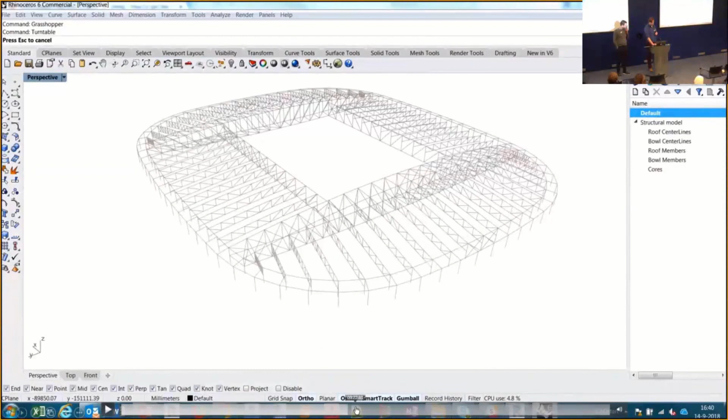From these structural models we had a couple of different variants we calculated, and we created a plugin that from our Karamba model generated a JSON schema that we were able to translate to a lot of different FEM packages, which was great because we could validate a lot of the calculations being done in Karamba. We used this base Grasshopper model as a basis for all the engineering analyses that were done.

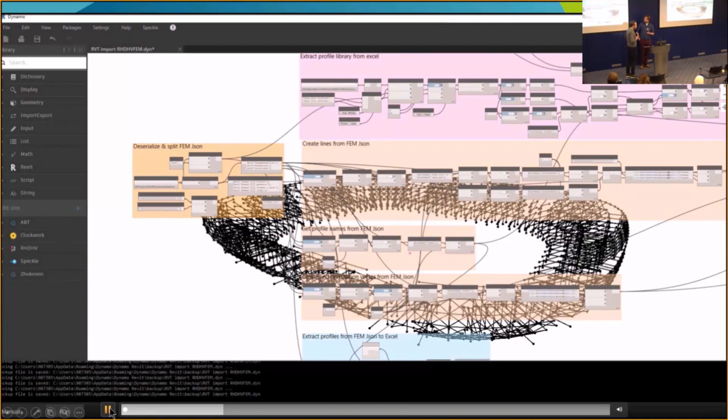We were already developing some software in-house, and we had our own structural object model basically in place at that point. We implemented our own code on top of Speckle, and that's where we were able to connect even more software packages. For now this is in-house development only, but we have to see where this goes. We also have to connect it to the existing structural model in Speckle, and that's the next step on our roadmap.

From the information we accumulated in our structural design analysis, we were able to generate our BIM model immediately. This is a workflow we have seen already a lot tonight. But at that point, to be able to get the structural members in the right position in Revit, we did require a Dynamo script to make sure everything would end up in the right place, and to deal with the different concerns we have in a structural model versus the BIM model.

To be able to calculate, we had modeled initially all the members based on their center lines, the reference lines, making sure they intersect at the nodes so we can easily calculate from that. But that was the information we had, and then we had to generate the BIM model from that, so we needed Dynamo to make sure we positioned all the members correctly.

What we found is that in these interoperable workflows, we need to accommodate for these different concerns you might have in different models. This is something we have to get processes in place for within the company, but maybe there are also opportunities for automation here. I think the processors would be very interesting to see if we can use for these kinds of use cases, to reposition and deal with the different concerns in the software.

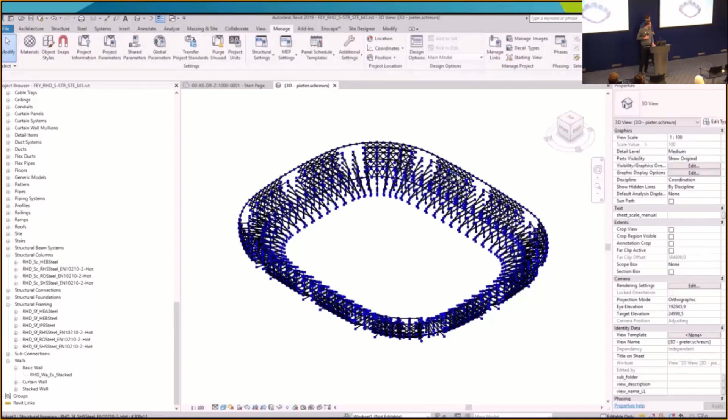In the end, we ended up with a completely collated BIM model with all these structural members nicely in place, based on the workflow we set up with Speckle.

So what we did on the base of the Speckle server, we actually implemented Speckle where we had the Grasshopper models or the plugins that were in place at that point. And we used our own RHDHV FEM implementation to deal with Karamba and the structural analysis software, and eventually generate our BIM model from that. Both in Revit and in IFC, we had code in place to generate the IFCs on the fly, and that's how we implemented this whole workflow within this project.